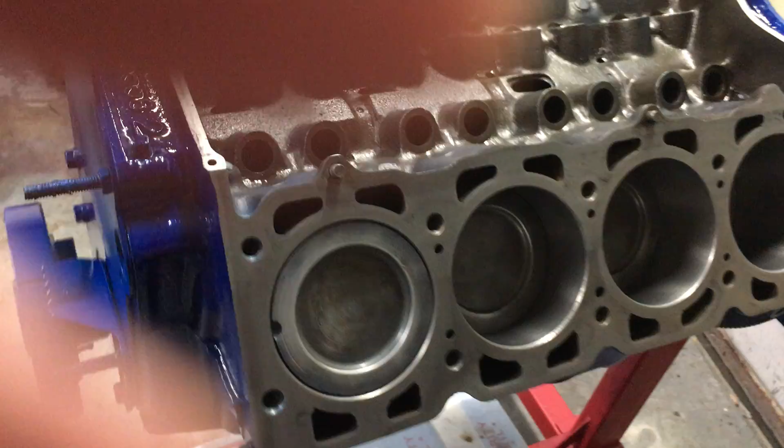I just wanted to give you guys a quick video here because there's so many inconsistencies online, and believe it or not, even in the Chilton manual. I'll give you a quick idea of what I'm talking about here. If I go to Camshaft Installation in the Chilton manual here, let's see what it says.

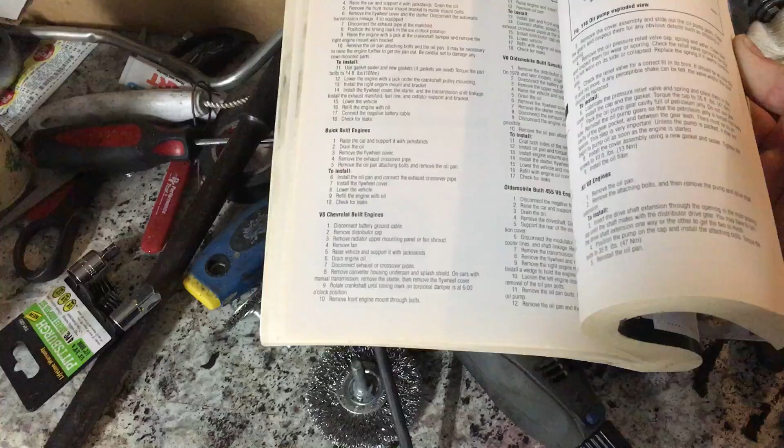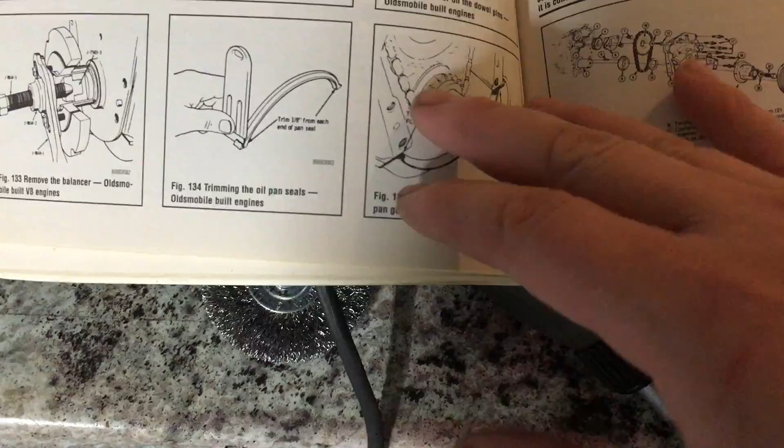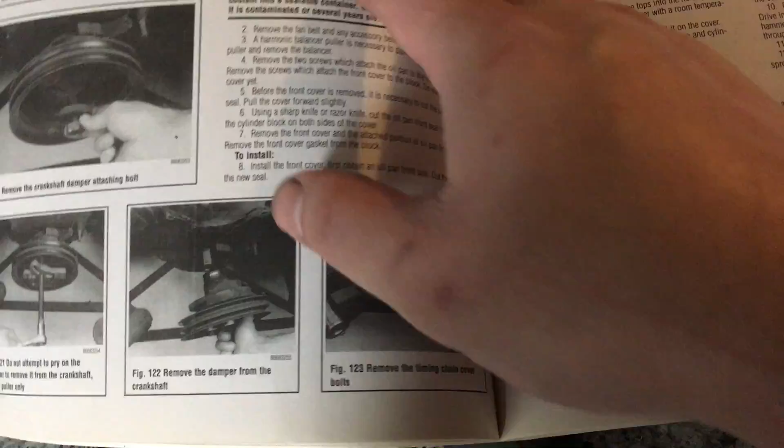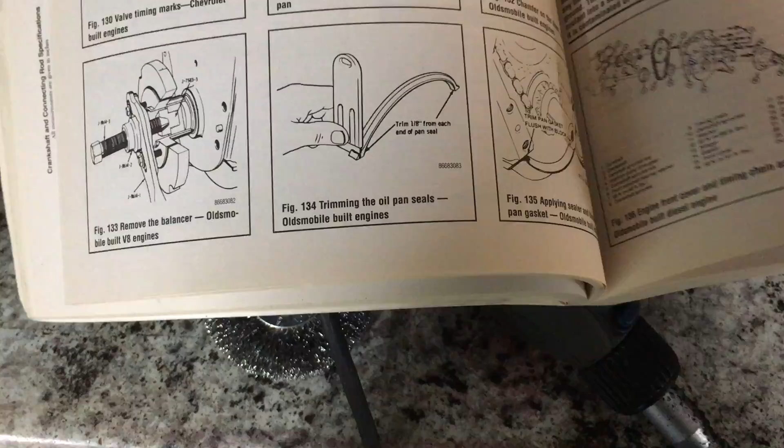Head removal, I'm going to touch on a couple quick things here. Okay, so right here it says built engines to install. Oldsmobile diesel engines. Where does it say? Oh, just give me a page. Okay, V8 Oldsmobile built engines. Disconnect the negative battery cable, blah blah blah. Remove the oil slinger, timing chain and camshaft, blah blah blah.

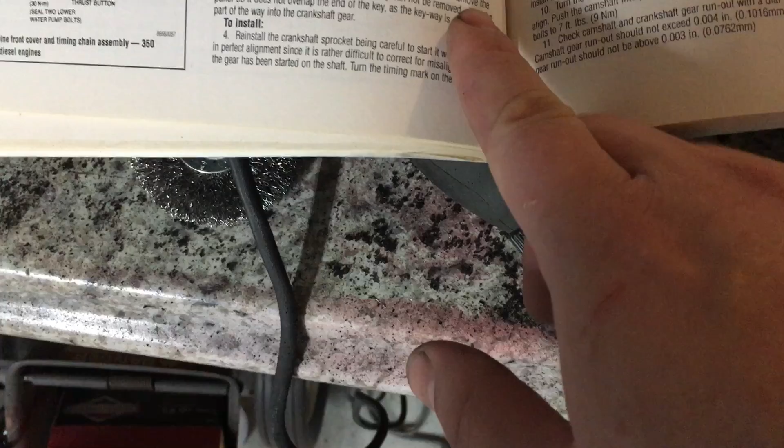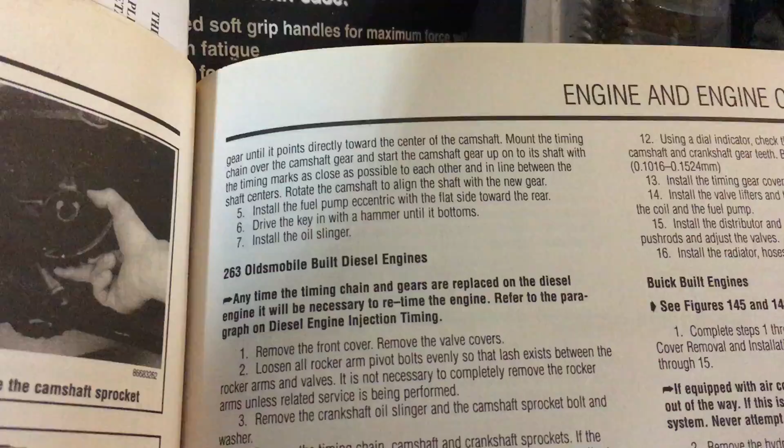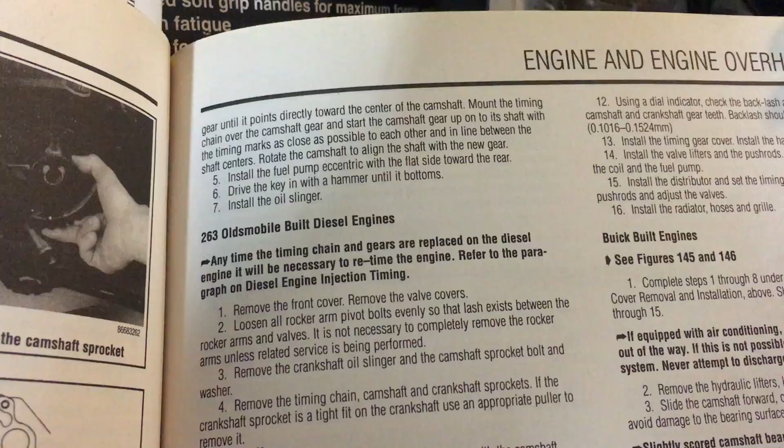Turn the timing mark on the crankshaft gear until it points directly to the center of the camshaft, so to 12 o'clock. Mount the timing chain over the camshaft gear and start the camshaft gear up onto its shaft with the timing marks as close as possible to each other in line between the shaft centers. Rotate the camshaft to align the shaft with the new gear.

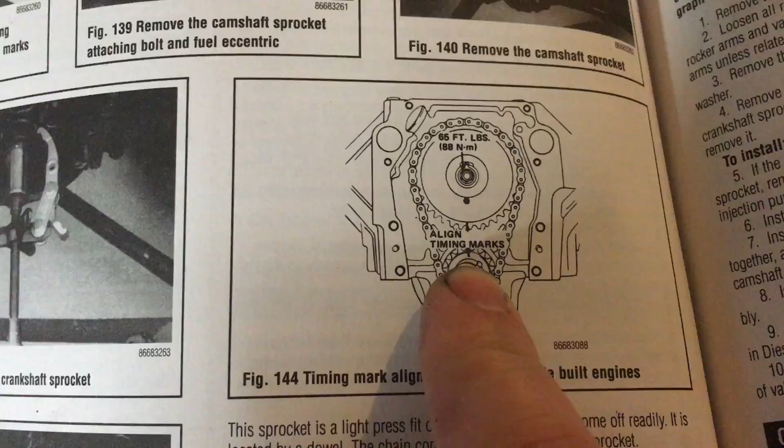So, what it shows right here, timing mark alignment, Oldsmobile built engines. The mark at the bottom, the mark at the top. The Chilton manual is telling you to install this at 6 and 12 with the number 1 cylinder at top dead center. If Maury was watching right now, he'd be saying, that's a lie.

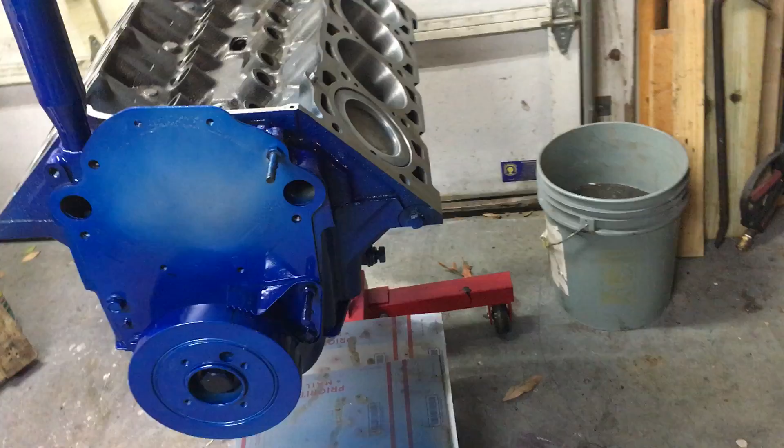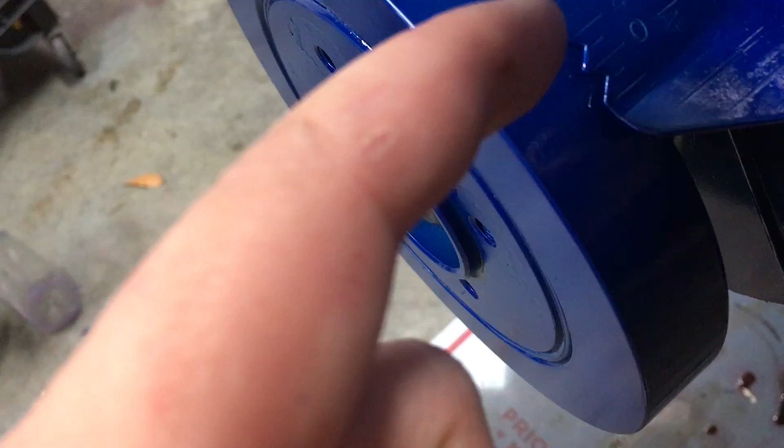So, what you actually want to do is have your camshaft at 12 o'clock and your crankshaft at 12 o'clock. Number 1 piston at top dead center. Almost, you can see I'm a little bit down here. And then we'll find our timing marks here with our crankshaft in place. And you see we're at about 8 degrees retarded right now because we're a little bit below top dead center. About a half a rotation, which I can do for you guys here.

Craftsman tools, gotta love them.

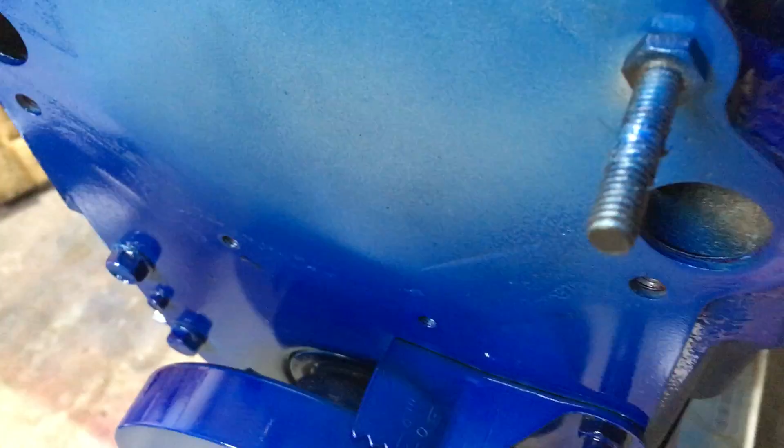So let's bring that to 0. Number 1, top dead center. Funny thing is, number 6 is also at top dead center. What does that tell us? Well, that the engine works right. But let's take a closer look. You probably won't be able to see because I know I won't be able to see right now. But if you could see down inside the lifter bores right there, the number 6 cylinder is not on the compression stroke.

That's 8, that's 6. You can actually see here the number 6 cylinder, this would be exhaust. The motor's rotating clockwise, okay, so it's rotating around us. The exhaust valve is just closing, which means that the intake valve, you can see there, is about to come up and open, which means we're on top dead center, but we're not on the compression stroke. We're just leaving the exhaust stroke.

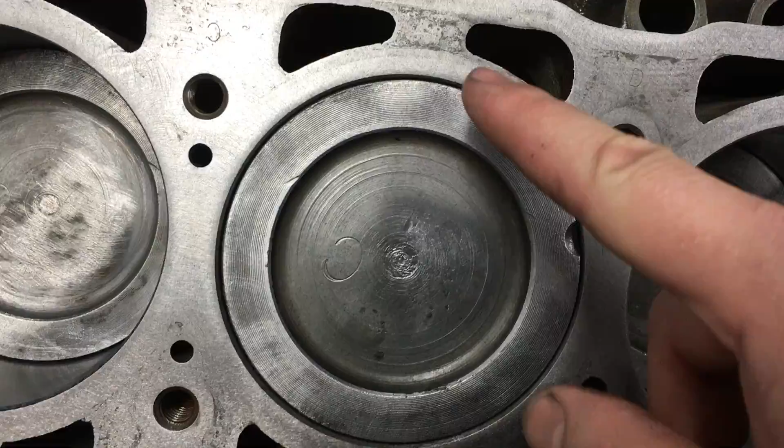Over here, the number 1 cylinder, I don't have enough light down in there, but both lobes of the cam are facing the opposite direction, which means we're on the compression stroke. Timing mark lines up perfectly.

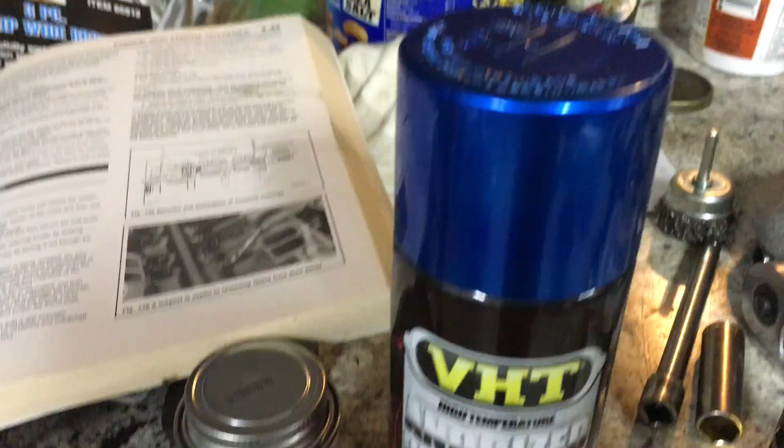The color of the engine, I used this VHT anodized color coat. I used a Rust-Oleum silver undercoat because the stuff is really kind of futzy. I mean, I love the color, but I hate the way it applies. It's probably the worst engine paint I've ever used, but I wanted this color. Oldsmobile, you know, is gold. I didn't want gold, I wanted something different. So to get something different, I had to go with this.

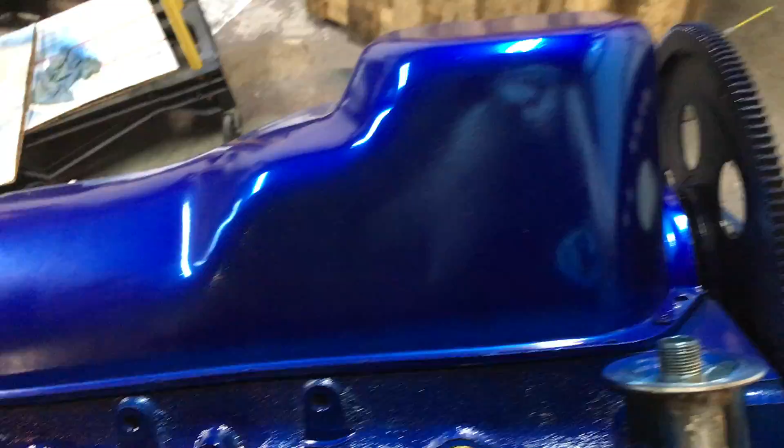I had a chrome oil pan. You can see how nice that looks. I didn't have to coat that with anything. So it gives it a nice metal look, but it really takes a minute to get used to working with it. So let's get this rotated back around here. Our oil pump is in.

But that's one of the biggest misconceptions. There was a thread that I found on an Oldsmobile forum that let me know 12 and 12. I couldn't remember. It's been 18 years since I've had one of these motors torn apart, and of course I didn't pay attention when I tore it apart. And I do have another motor sitting over there, but it's totally seized. So I didn't put the motor at number 1 at top dead center to see where the marks were. Otherwise I wouldn't have this confusion. So that's my mistake, but for anybody else out there looking for it.

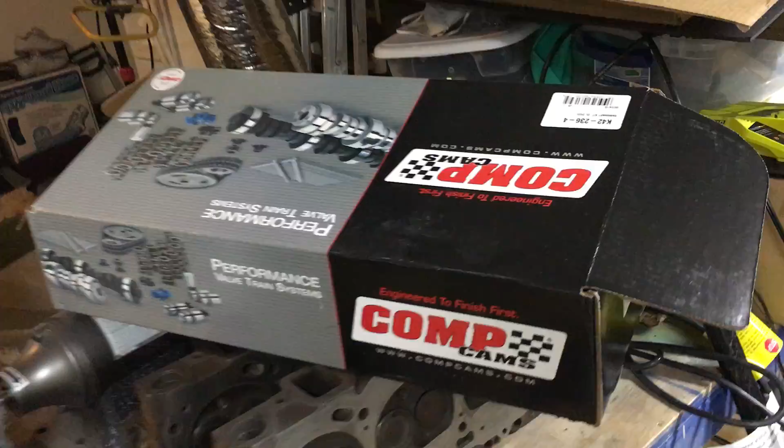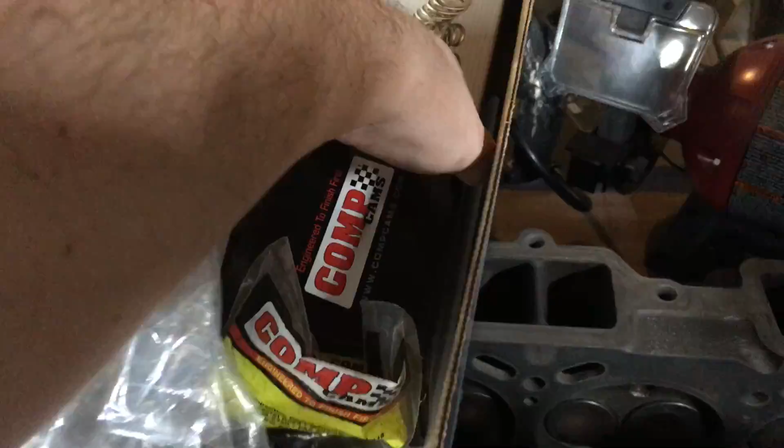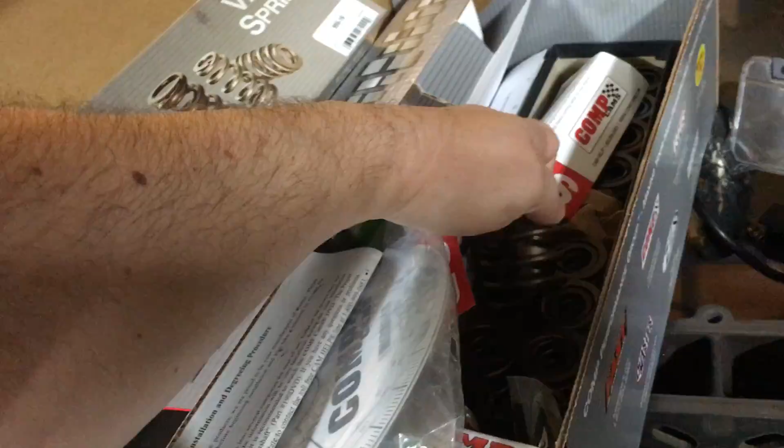If you want to go with a big cam and you want to not have valve float, which has blown up an Olds motor on me before because I went with a big cam and I had stock type valve springs. They were brand new, but they were stock type, and it would float at about 5,300 RPMs, and I wound up throwing a rod because there was so much pressure inside the motor.

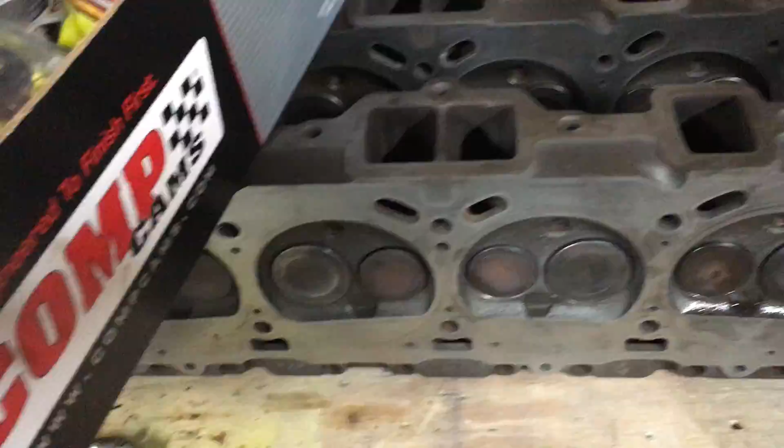So I buy that. I got my heads all done here. Now mind you, this was like a 50,000 mile 1971 Olds 350. I tore it apart, I did all the work myself. Everything is super tight in the motor. You can see I've honed the cylinders here. I just basically cleaned everything up. I have new rings, I have new bearings, of course all new gaskets. The heads were leaking bad oil back here, so I wanted to get everything clean and just do a once over before I drop it in my Cutlass.

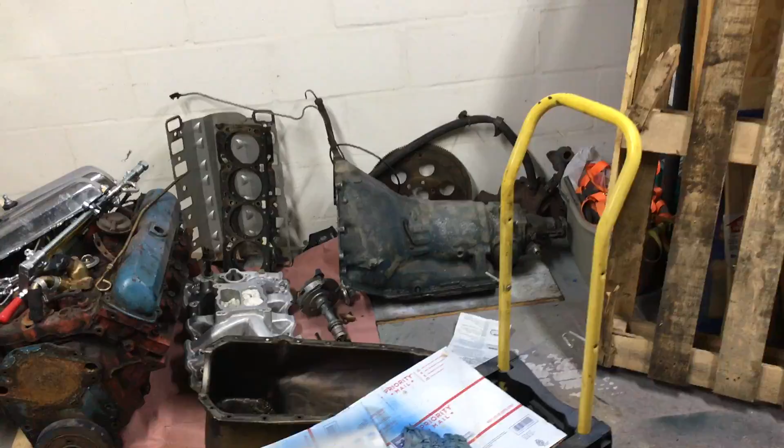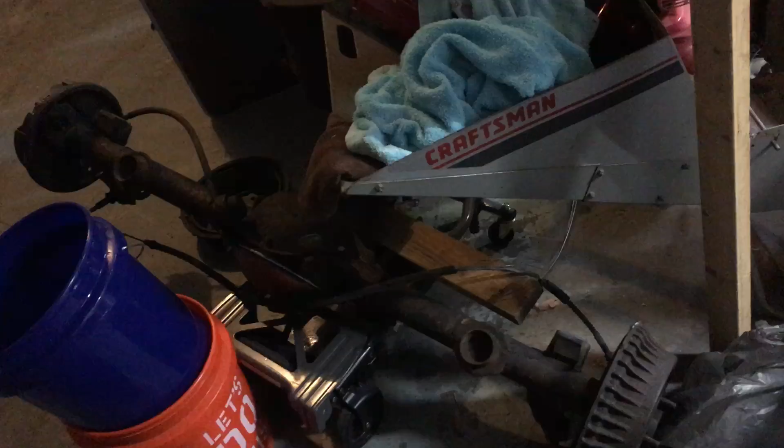I have the trans over there that only has about 20,000 miles on it that I'm going to be doing, you know, like valve body and then all the seals and everything on that. And then I have a rear end over here. I'm going to be doing the same thing. It's a 373 posi unit already all set up, 35 spline axles. So freshening up the car. It's a 1980 Olds Cutlass. She's sitting out there.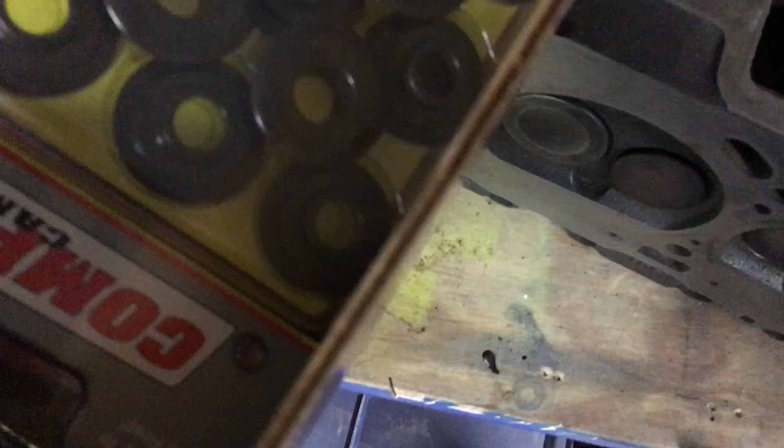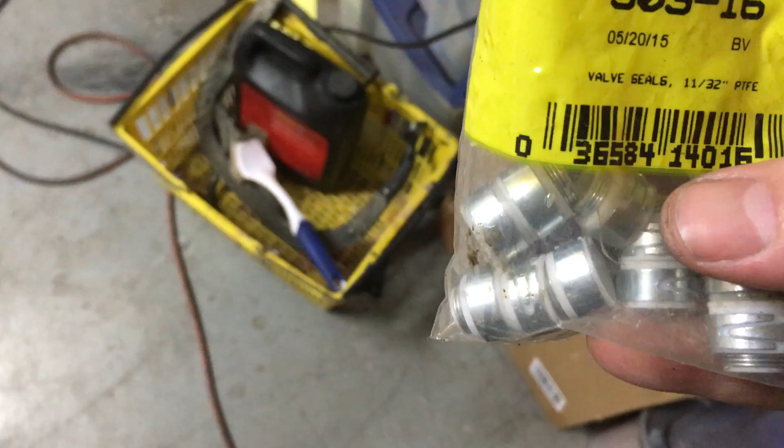Anyways, so I get the camshaft kit. I get the valve springs. I go to put them on the valves up here. Seats fit fine, but the stock Olds heads need the valve machined here so that these type springs will sit down over it. They're 0.53 inches and the valves are 11/32. I've lapped the valves, the heads are all ready, I'm ready to install, and I'm running across that problem.

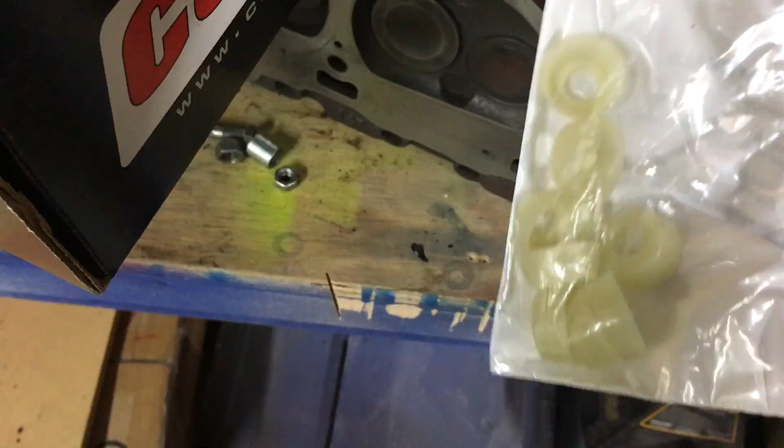So I have the full Fel-Pro gasket set here and I have the umbrella style. So what do I do? I grab one of the old umbrella style kits from the valvetrain, put it on. It doesn't fit inside the valve spring because it's the double spring. You can't run with the single spring because of the valve lift. So the only way to get these to work, which now I've actually ordered better valve seals because I had to order the tool, and I'm going to cut the valve stem seal on the cast iron heads there.

So since I ordered the tool to do that, I ordered some better valve seals, and this way I have some extra Comp Cam ones here just in case I run into an issue. But the stock heads need to be cut. It's about $68, $70 for the tool that will cut the head. So I'm waiting for that to come in.

That's the confusion that I've run across, and it's only a 518 lift cam. I'm not trying to go with some 600 lift, something crazy, stupid, or ridiculous. Just a 518 lift, but that does need these valve springs because the stock ones won't hold up to it. You'll get valve float, and you can't run these springs with an umbrella type seal.

So with that being said, you need these, you need the cutter.

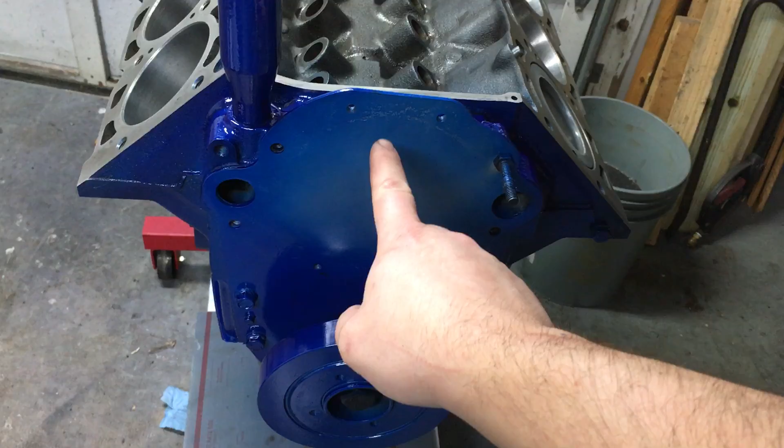And just a little reminder again on the timing. 12 and 12, not 6 and 12. Chevy is 6 and 12. Oldsmobile, 12 and 12. Got that all together.

The motor's ready. I'm just waiting on the tools to come in because nobody local had one, so that I can get the valve stem seats cut, get the new seals on. There'll be a nicer seal anyway, so we'll have better resistance. You can see how tight the cylinders and everything are. I had some oil in the cylinders themselves, and it's still sitting in there.

I did just use some purple stuff inside the water jackets, hosed them out really nice, let them dry, blew them out, used some metal style pipe cleaners to get down there, clean it out really good. I redid the freeze plugs with brass. It was all original 1971. So I redid those with the brass freeze plugs.

For this being all original and about 60,000 miles, the motor's perfect. Main bearings, everything was super tight. I replaced all the bearings, but the bearings for 60,000 miles barely got anywhere. So if you want a nice Olds 350 motor, go to the 68 to 72 blocks and heads. I got number 7 heads. It's going to give me about 8.5 to 9 to 1 compression.

Stock, that motor was about 275 horsepower or so, according to Chilton's. How much I can believe that or not, who knows. So after I'm all said and done with the bigger cam, lifters, all new rocker arms, all new valvetrain, headers, Edelbrock Performer RPM intake, Holley carb, I should be pushing probably 350 horsepower. So we'll see how it reacts when I get it on the street. I'm sure somebody will tell me that I'm not going to have that much horsepower, and somebody will say 100 other things.

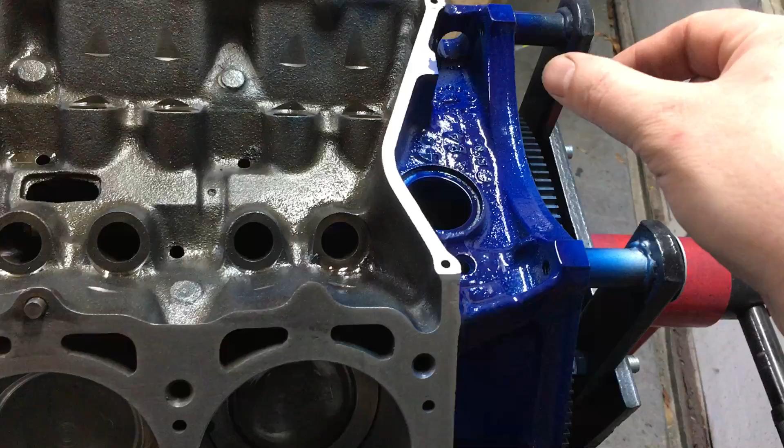Now, when you drop in you can see our push rod there for our oil pump. When we drop in our distributor, we make sure that our rotor is pointing at the number 1, which is right behind where the electrical connection plugs in on our HEI, right behind the last clip there. Make sure it's pointing at number 1, wire everything up, and it should fire up perfect first time.

Also, high volume water pump. I got a GMB on Amazon for $48. Summit sells a Milodon for $95. It's the same unit, aluminum, high performance. Picked that up. Melling high volume oil pump.

I picked up a high volume fuel pump off of Amazon, because Holley and all of the reputable names don't make one anymore. It's just a knockoff. I'm gonna see how it goes. If I have to go to an electric pump, just see what the motor requires, what it does, how this pump works out.